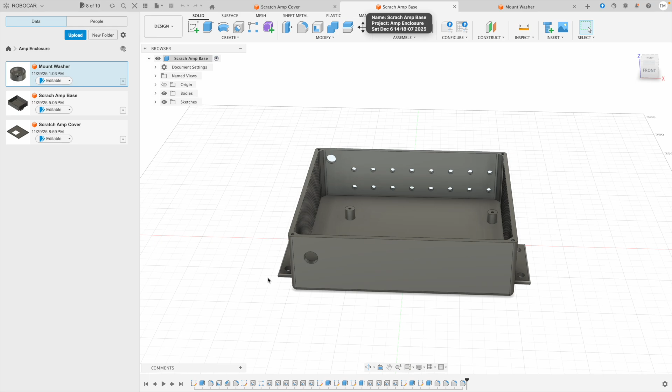So in the process of this - it's just a board, and I don't want to strap this to the profile rig with zip ties or something. I decided to make a little enclosure with Fusion. I actually taught myself how to use it via Udemy videos, and I kind of like the end result.

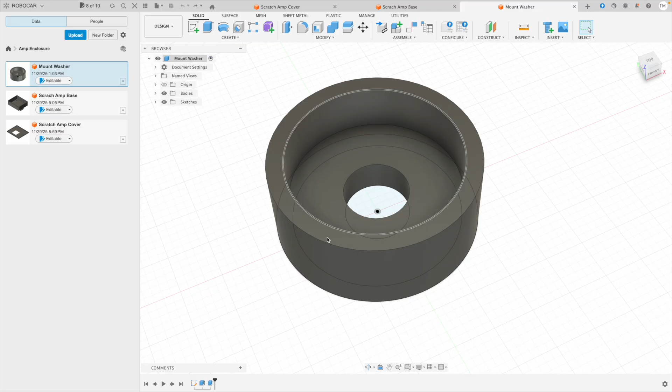So I've got a few risers right here to keep the board off the bottom. I printed this with PLA CF, so there's some carbon fiber injected into the filament. I did these little washers in regular PLA, just in case, so we don't have any conductivity issues with the carbon fiber happening. It should be good as long as you keep it on the screw mounts for the most part.

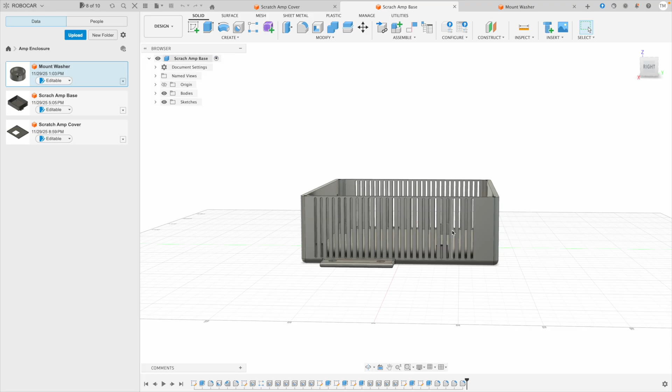I got a couple areas just for ventilation, and then I'm actually using banana plugs, so I just got a couple from Parts Express.

I put all 8 adjustable channels here, but I'm only wiring up 4 of these for the time being. When I show that part off, you'll see that. And then of course the mount on the rig right here.

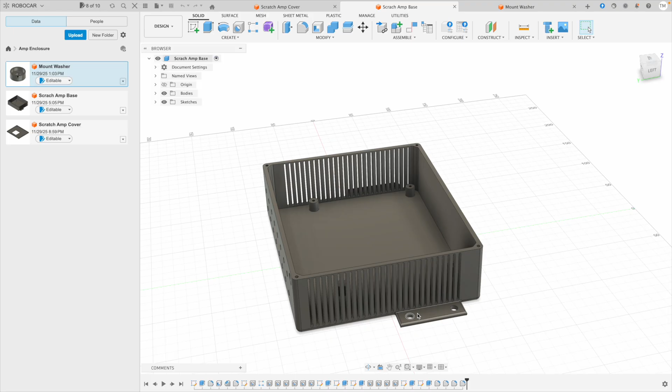I really wanted to have all rounded corners on this, to make it kind of nice and a little bit stronger, with chamfers for these little screw holes here. Probably could have moved those in and made this a little wider, but I wanted to keep this compact. And then of course, the little cover - when I was developing it, I actually mounted the board inside of it, so I knew exactly where to put this little square hole.

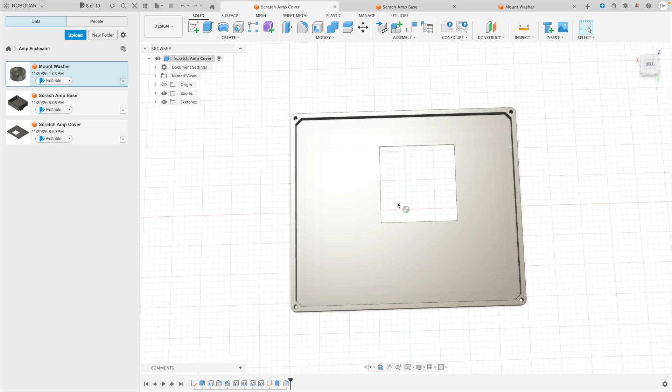With its little fillets on the outside there, for the fan to blow out the hot air, because otherwise I'd only have those side ventilation, and this fan does kick on quite a bit. Not sure how programmable that is, but it does kick on, so it does get decently hot.

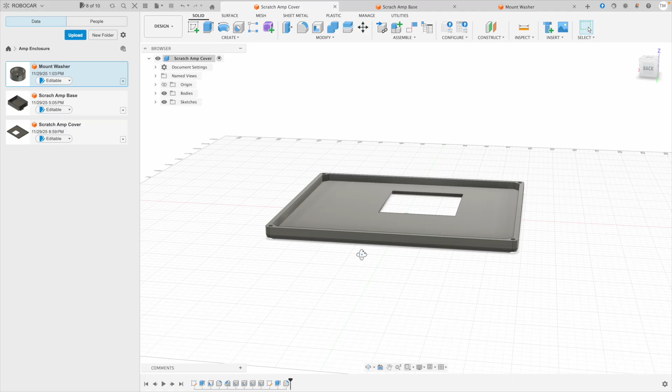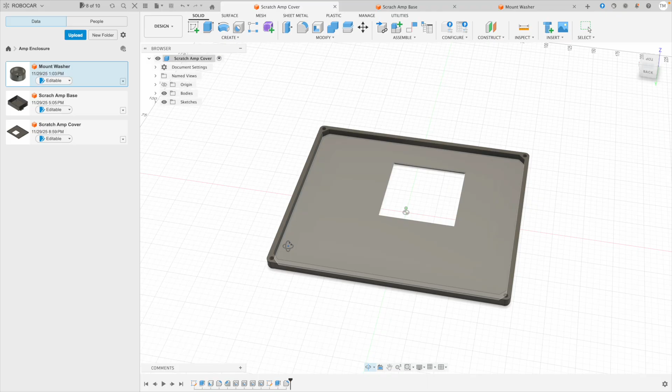I just got to make sure over time - I've had this running for a few weeks, and I have no issues with the PLA deforming at all, because PLA does have a lower melting temperature, but it seems to be working out pretty well. So yep, that's pretty decent.

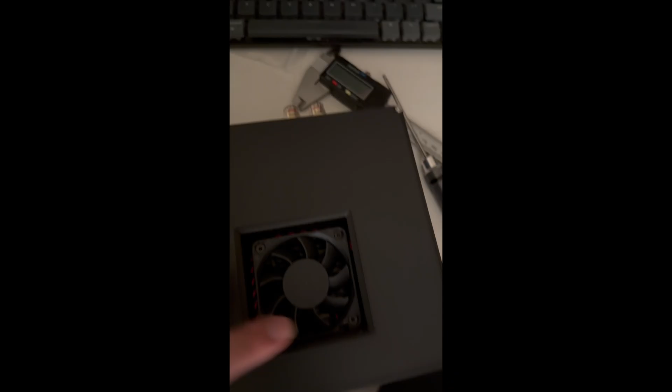I finally got together with my designs. I just ended up putting a piece for the fan, keep it open like that, but on the sides I have some grids on each side.

Mounting plate for mounting up to the 80/20 aluminum profile. I only installed some of, like 4 of the channels for now. Later on I may go and open this thing up and add those other 4 channels if I actually need them. But right now I've only got 2 bass shakers and 2 pedal shakers. So that's all installed for now.

I got a toggle switch in the front. Yep, so all designed from Fusion, not 360 anymore, but Autodesk Fusion. Yeah, so excited to learn some of that for this project, but turned out pretty good, I think.

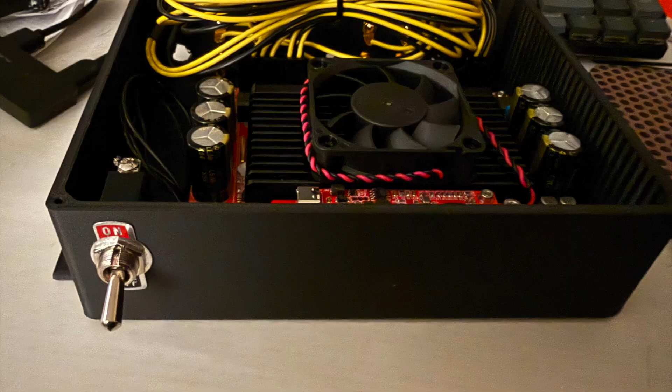I've got it mounted on the side, just with a few T-nuts and M6 bolts. So then I have the switch up here, so I can just reach in and turn it off standby and turn it off again whenever I need to.

When I'm ready to start everything up, so I have to do that with the wheelbase and Arduino-based units, like the flight box, the dash, and of course the button box. And then if we'll go around and have it mounted right on my monitor stand.

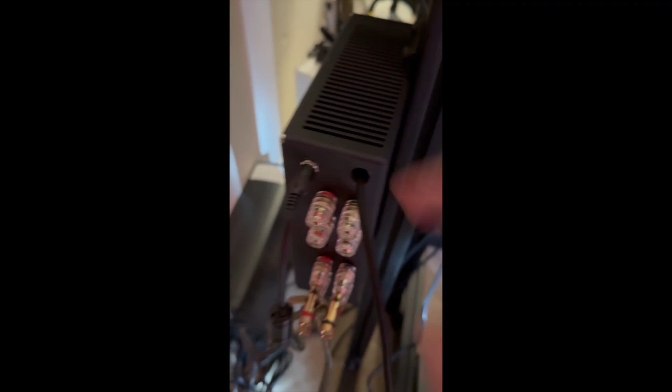And I have a couple banana clips, clip those things in place. And in my design, I had to drill this out because I forgot - sometime I did Control Z and I lost a little hole right here, so I just drilled that out for now. I'll add it to the actual design later on.

But yeah, that seemed to work out pretty good, and definitely punches harder than the old Nobsound. And here's the cheapo PSU I got off Parts Express, but that seems to work pretty well, at least with the 2.

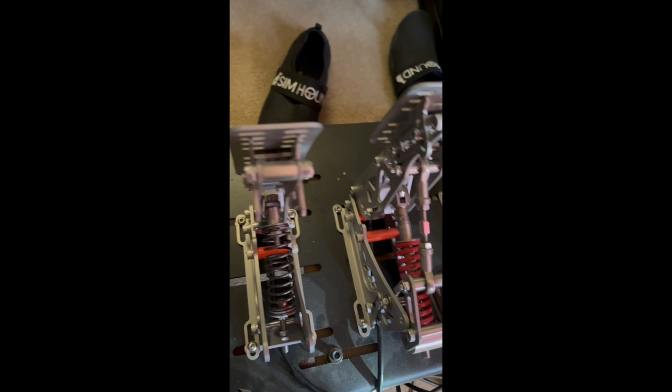I'll be adding pedal for the throttle and the brake, just have a couple of pucks to put on the back of those, kind of feel the TC and the ABS, but that's what that brick looks like. So that actually worked out pretty good.